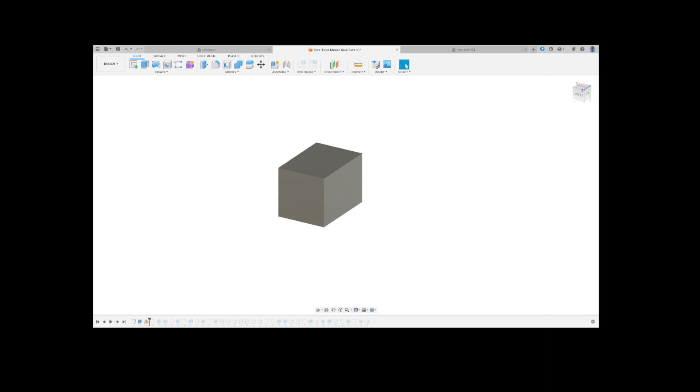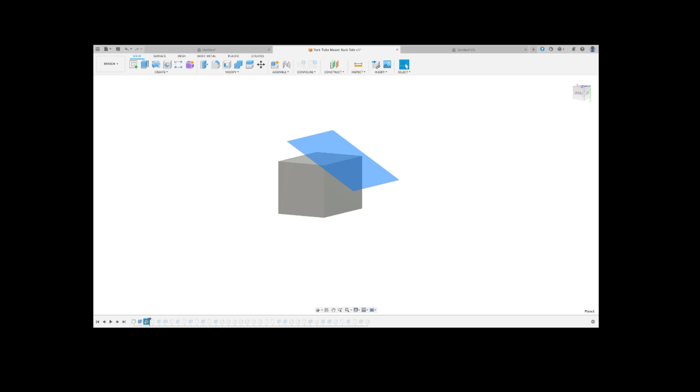The following steps is just simply a creation of this plane here. This blue box, or this blue square you see here, is a plane that I inserted at an angle, and that angle represents what that rake of my front suspension is. From this, I start building the actual bracket based off of that plane itself, which we'll see here pop up in just a second.

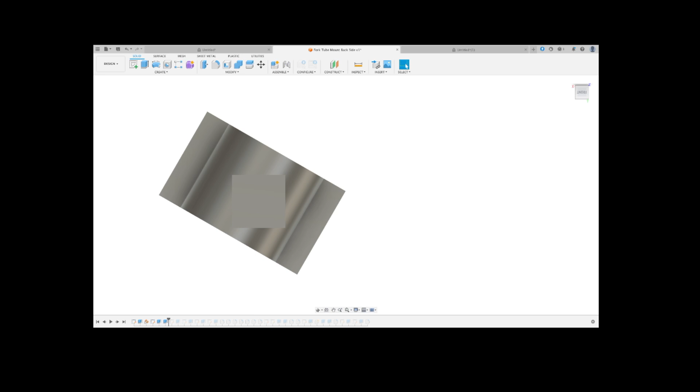And as we progress through this, what you're going to see is me actually going ahead and minimizing the overall height of that bracket. I wanted to reduce it. I didn't want it super big or anything like that. So that's just me kind of getting that matched up a little bit more and things like that.

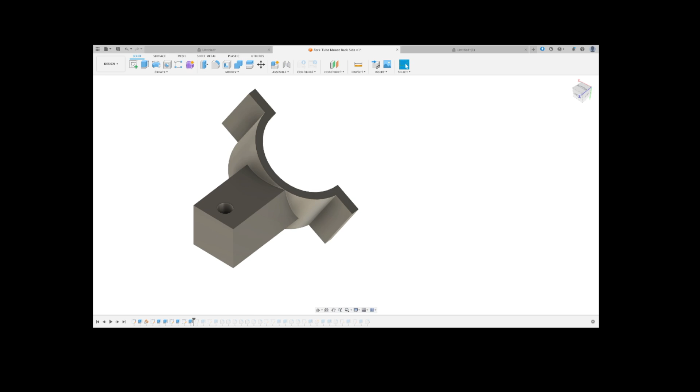Following steps here coming up are just going to be adding the hole for the light itself, right? That is just where that bolt from the light bracket itself mounts to this tang. And that bolt is only so long. This particular tang was too thick, so I have to remove a bit of material, so that way the bolt itself can pass through that, and I can use the nut to attach it to that tang.

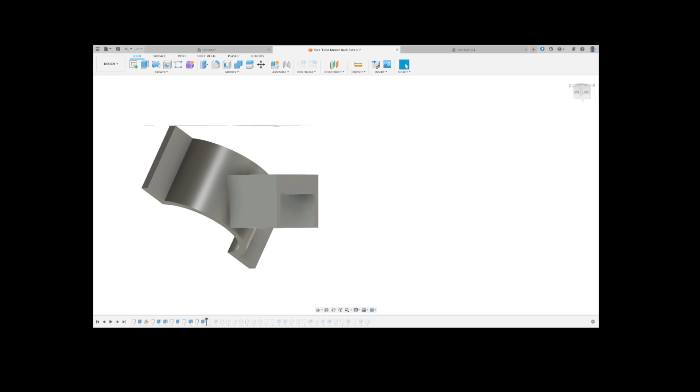Following steps is just kind of cleaning this up here a little bit. I ended up going through and removing some extra material and getting an angle on here to still provide support for that light as it gets further away from the bracket itself.

And then the following steps here are going to be actually adding in a fillet to some of these very sharp corners, these 90-degree corners. While it would likely be sufficient for strength, adding a fillet does help add additional strength and support, and reduces that risk of a stress riser occurring at those 90-degree bends.

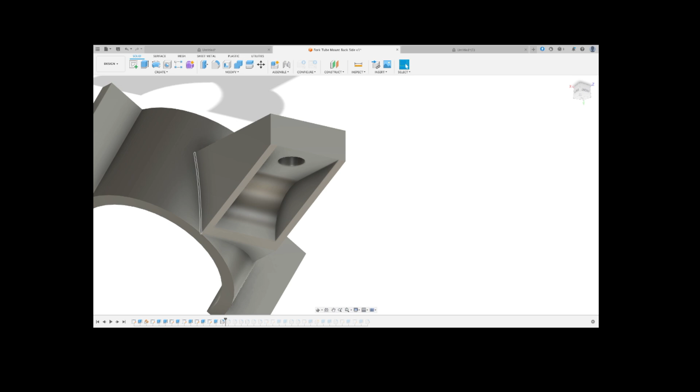Following fillets here, you'll see will start kind of being on these exterior edges, and these aren't adding necessarily any strength. It's rather just reducing the ability for this plastic to cut you if you catch your hand on it or something like that.

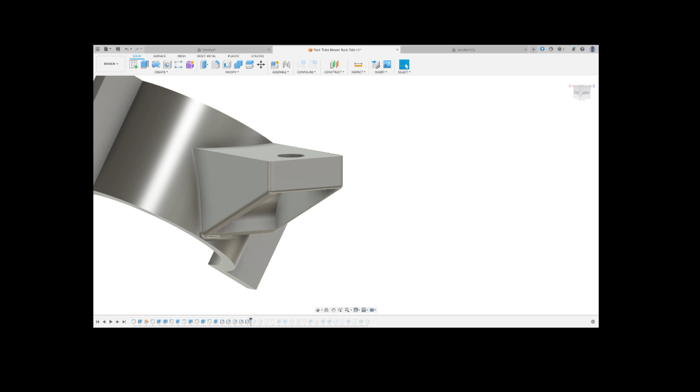I added some fillets here along these edges. Once again, this is where this is actually joining to the bracket, so I wanted to add just some additional strength. The next one we'll see here will be where this black bar is highlighted on the screen, and once again, that's just to help with strength.

Following fillets will be around this edge here on the exterior of it. Once again, that's just simply to help reduce the opportunity to cut yourself on those.

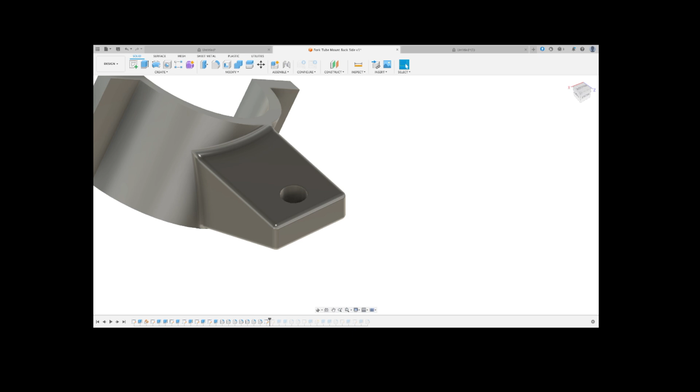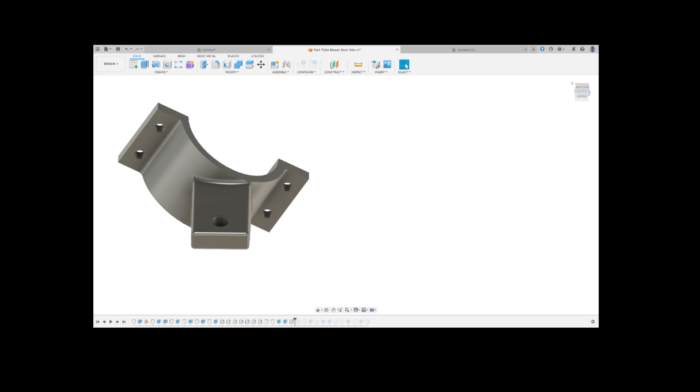The following steps here are going to be adding in the holes for the bracket itself. I want to be able to affix these two pieces together once I start getting the other half printed or made up. You'll see these populate now, adding some additional radiuses in here as well for strength. The following radiuses will be on these corners, highlighted here. I'll zoom in just a bit, but it'll be adding those radiuses just to protect from cuts and things like that.

At this point, essentially that portion of the bracket's complete. Now I needed to make the second portion that would clamp onto the back half of that suspension, and that's going to be showing up here in just a moment.

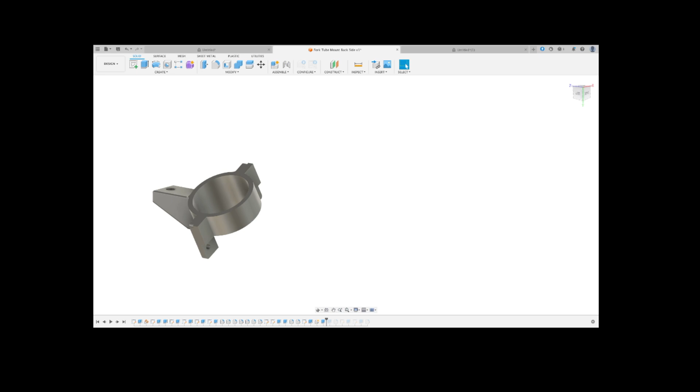You can see that's where I started creating that second portion of the bracket. Once again, not an expert in CAD, likely an easier way to do this, but I'll end up extruding this bracket down to match the same height as the first portion of that bracket, and then adding in some more fillets just to match it so it's the same.

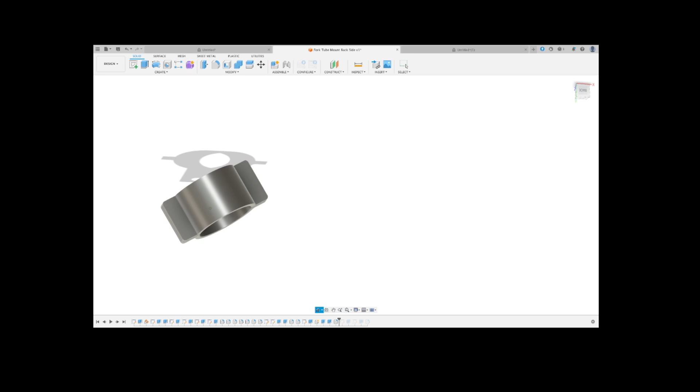The following steps will be just getting the bolt holes on this plane here, highlighted, and also this one right here. So you'll see those pop up here in just a moment, and there they are.

From this point on, the bracket is essentially complete. I will export this into either an STL or a step file without getting too much into the details on that. The STLs can be a little bit more rough for circles because of how it processes the code for that. A step file will help keep anything that has a radius on it more true to being a radius itself.

With that, we'll step into the software that I utilize to slice this component for the 3D printer itself.

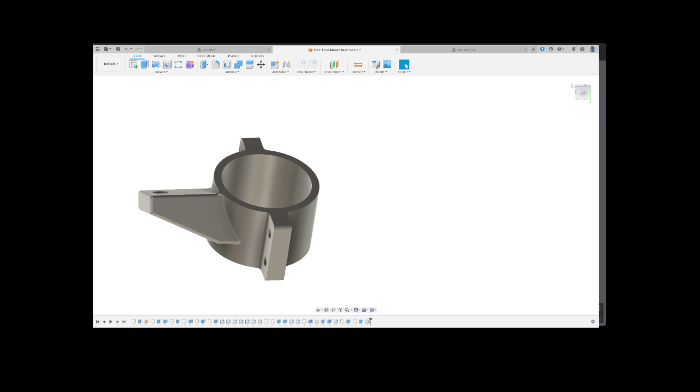Alright, so now this next portion here is going to be the slicer. This slicer that I use is from Bambu Lab, so it's called Bambu Studio. This is specific to a Bambu printer itself. Other slicers will do similar functionality. It just depends on the printer that you have and if there's a proprietary slicer that's utilized with that printer. You can use other slicers such as Orca or even Cura as well for a Bambu printer.

You just have to save that G-code file to an SD card and put that into the printer. If I continue to use the Bambu Studio, I can send that to the printer wirelessly, so that's why I just stick with the Bambu printer or the software itself.

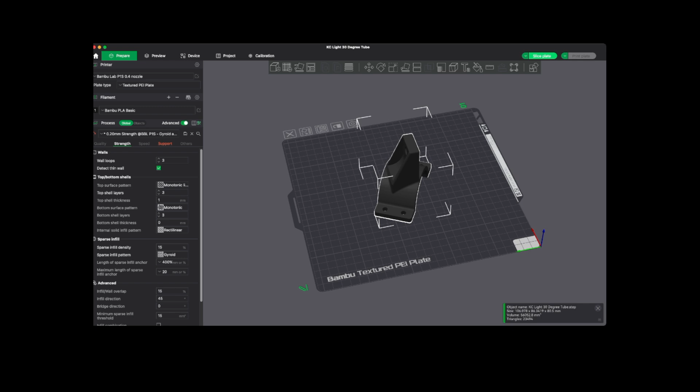So with that, we'll just jump into some of the things that I end up doing with this. Once I import this portion of the bracket, it comes in just oriented this way. I'll end up using the auto orient from the software itself. It's likely doing this to help save or reduce the print time and everything like that.

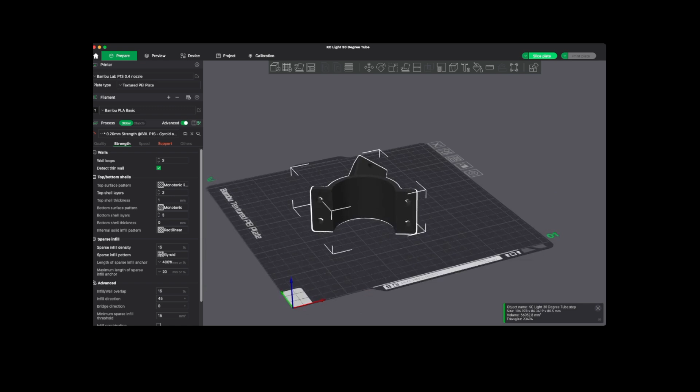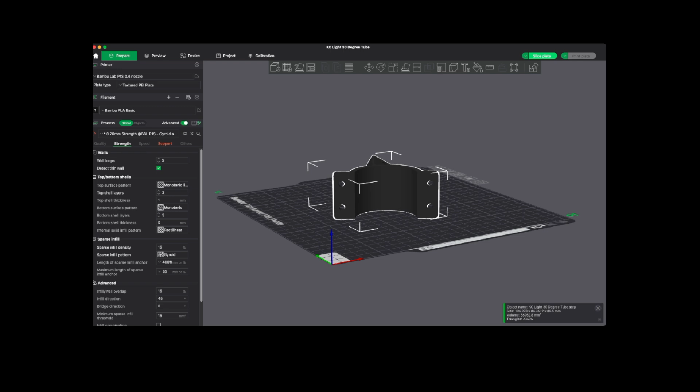Some watch outs, if you're not familiar with 3D printing, you have 3 planes of axes. You'll have an X, Y, and Z plane. When you print items, they obviously are going to go up towards the sky. So this blue arrow here in the bottom left hand corner, that's your Z plane. That is the weakest of the 3 planes for printing strength. So depending on what you're printing, if it breaks, you may need to reorient your part on the build plate a different way to help with strength. In this particular situation, this is very strong, even with the Z axis and this height this way.

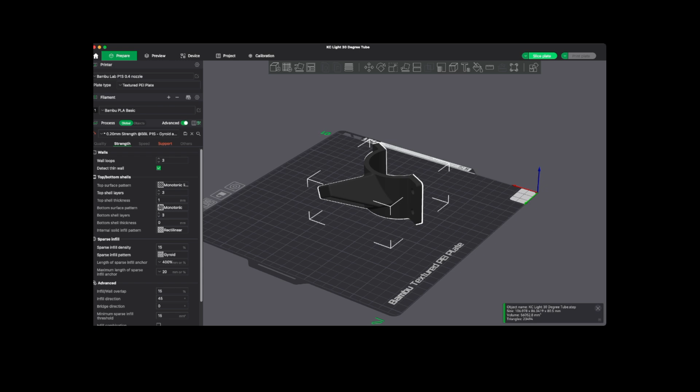I ended up sticking with a 0.2 millimeter layer height. The Bambu printer that I use is the P1S. It's got great quality at 0.2 millimeter layer height for me, so I don't need to reduce it down to something smaller to help achieve the detail that I like. Because I'm printing this as a prototype part, I'm using PLA, so it's a lot cheaper than some other materials and things like that.

Since it's a prototype part, I've reduced the amount of wall loops I use, and even the infill percentage, just to save on material and print it faster so I can test the functionality of the part. Once I get to printing the final product, I'll actually be switching to a PA6CF filament, which is going to have more robustness compared to PLA material.

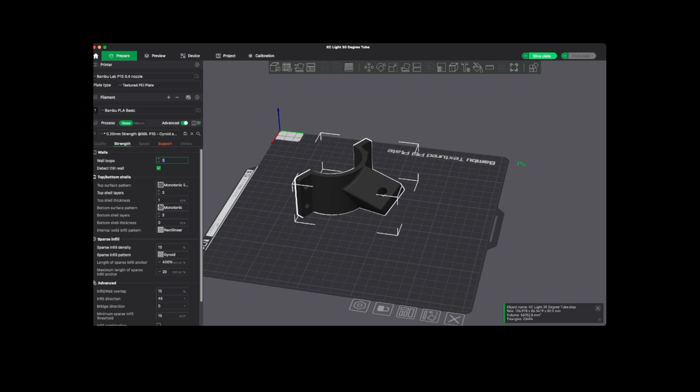It's going to be stronger, better for the weather, and things like that. Once I switch to that, I'll be adding more infill density to add some more strength, and also increasing my wall loops, likely just by one, going from 3 to 4.

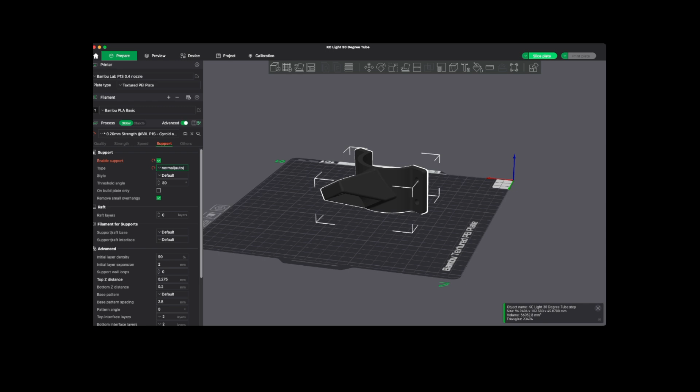Another aspect is that because this tang coming off of the bracket isn't touching the build plate, you'll want to add supports. I run a tree support. It uses a little less material, and I think it does a better job than the standard default support that most folks originally used.

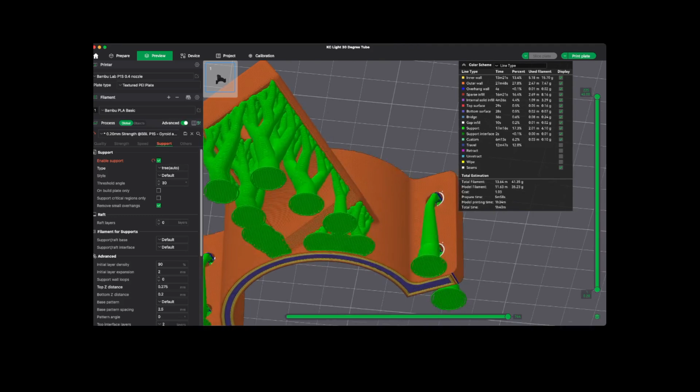If I slice this right now, you can see the final outcome here. The orange is the bracket itself, and the green portion is the supports—you can see they look like trees, hence them being called that. The support gives those overhangs, the things not touching the build plate, something to rest on as it's printed into the air.

If you don't have that, you run the risk of the print failing and not having good overhangs. Just to show you the difference between the trees and the normal supports, which look like skyscrapers, you can see there's quite a bit more material utilized throughout that.

So once we go ahead and slice that, I can send that to the printer and it will do its thing—it'll print it up for me, and that would be essentially the conclusion of this.

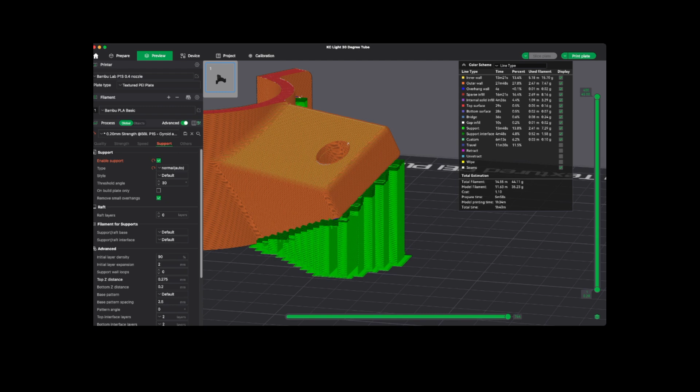One thing I'll talk about real quick, coming back to this, is the lights—I didn't really say anything about the light I end up using, and I'll have a separate video for that as well. This is just the KC Flex Era 1 pods, so it's just one singular light beam. They have the Flex Era 4s, which would be 4 light pods, so light bars for vehicles and stuff like that.

A good thing about these lights, really quick, is that they come with different lenses, so you can switch between a spot, a flood, and a wide beam pretty easily. I ended up going with these lights just because I like the smaller footprint.

I had utilized the prior version of the KC pods. They changed it—I think they were originally just called the Flex Eras, I'm not sure, but they had a prior version, and I just liked it, so that's why I stuck with that.